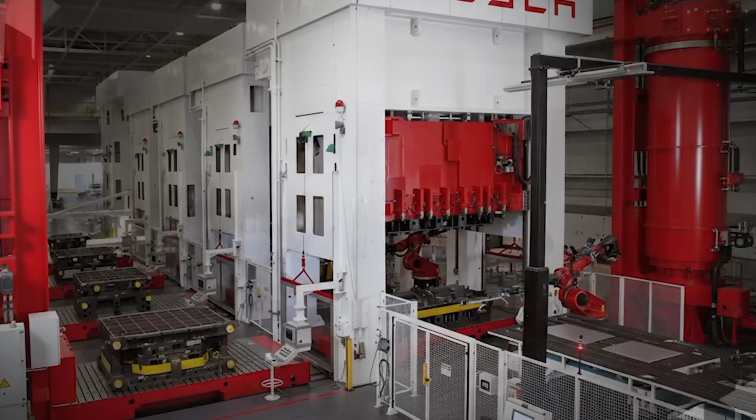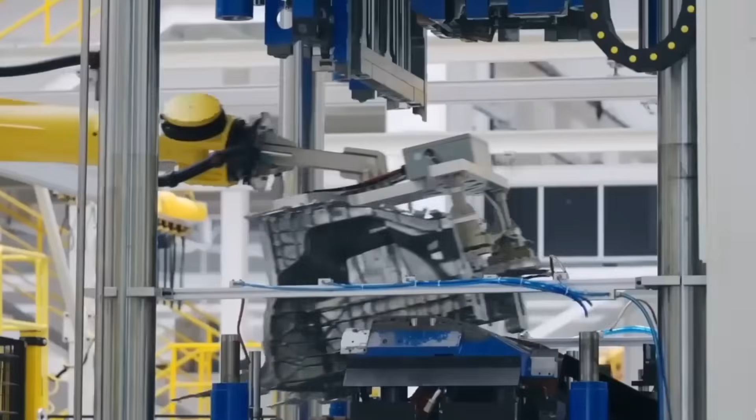For decades, China viewed itself as the undisputed champion of large-scale manufacturing, a nation capable of producing products faster, cheaper, and in greater volume than anyone else. Massive factories, endless assembly lines, and armies of workers became symbols of industrial dominance. Then Tesla entered the picture and began rewriting the definition of speed in automotive production. Not slightly faster, not incrementally improved, radically different.

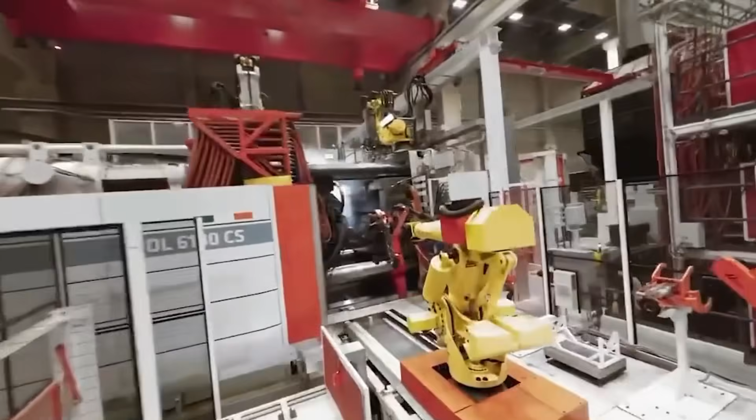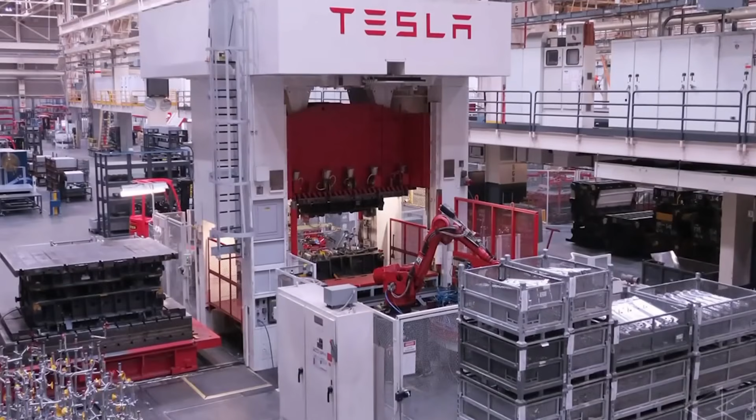Elon Musk has claimed that Tesla's next-generation production system could push output to the point where a finished vehicle effectively rolls off the line in under 30 seconds. That statement alone challenges everything the traditional auto industry has accepted for decades. At the center of this shift is Giga Press 2.0, an evolution of the original Giga Press technology that already transformed how vehicles like the Model Y are built.

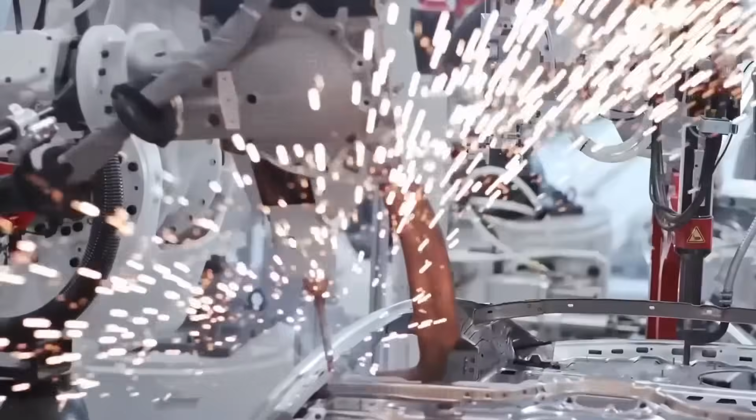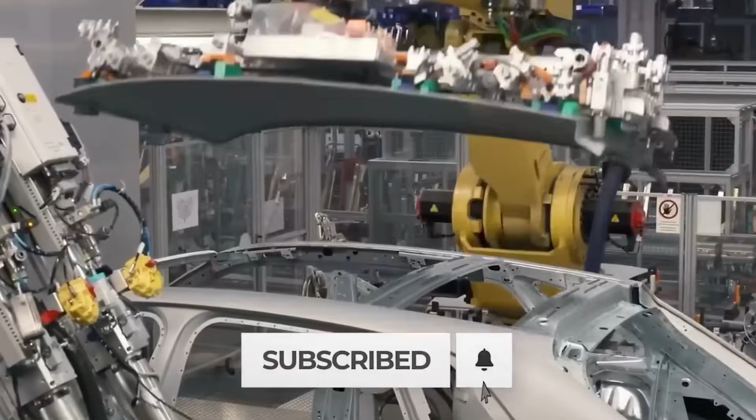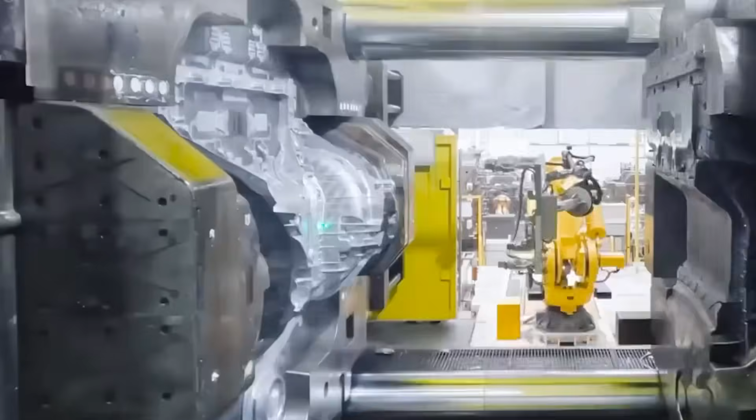Conventional factories rely on hundreds of stamped metal parts welded together piece by piece. Each weld is a potential delay, a potential defect, a potential cost. Even the most advanced plants typically require well over a minute, often closer to 2, to complete major structural assemblies. Multiply that by millions of vehicles, and the time difference becomes enormous. Tesla's approach flips that entire philosophy. Instead of assembling dozens of parts into one structure, they cast enormous structural sections in a single shot.

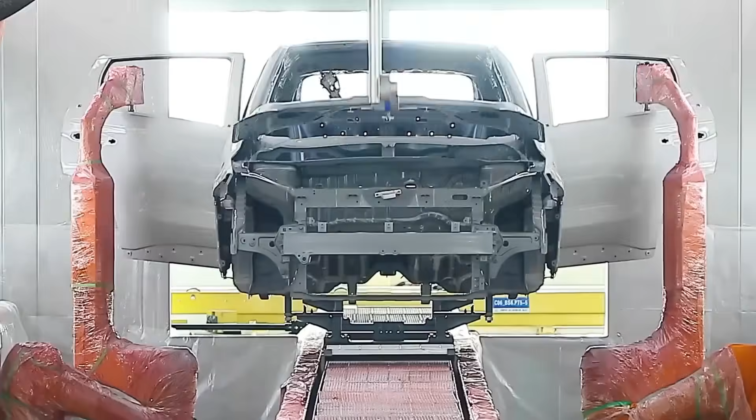Giga Press 2.0 represents the extreme end of that idea. Imagine a machine the size of a 2-story building, engineered to exert up to 50,000 tons of clamping force. That number alone sounds unreal. It is more than 8 times the force of the 6,000-ton class machines Tesla used to revolutionize Model Y production. With that earlier generation, Tesla replaced more than 70 individual components with just 2 large aluminum castings integrated with a structural battery pack. Production costs dropped dramatically. Complexity fell. Assembly lines became shorter and faster.

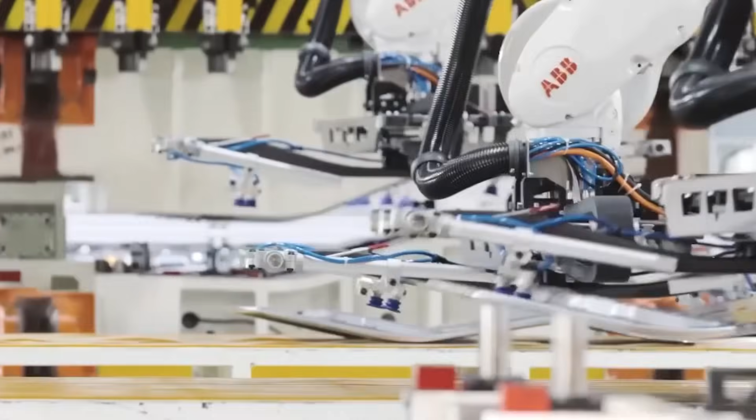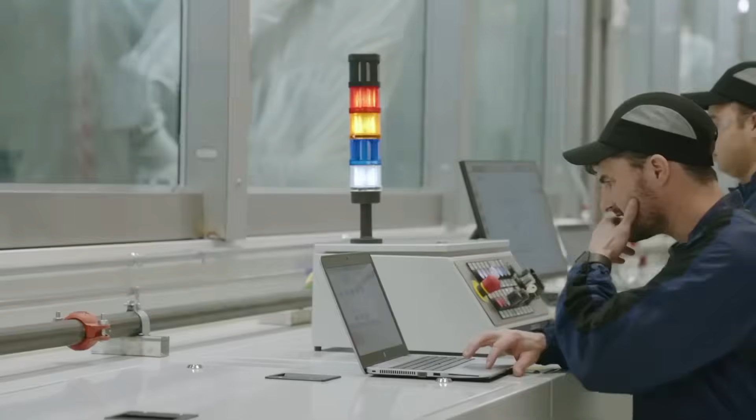Now Tesla aims to go even further. The ambition is to cast an entire underbody structure in a single seamless piece. Instead of stitching together dozens of structural elements, the chassis foundation emerges as one unified component. Fewer welds, fewer robots, fewer alignment checks, less opportunity for error. When Musk compares it to making toy cars, the point is not exaggeration for effect. It is about reducing the process to something that feels almost simple, even though the engineering behind it is anything but.

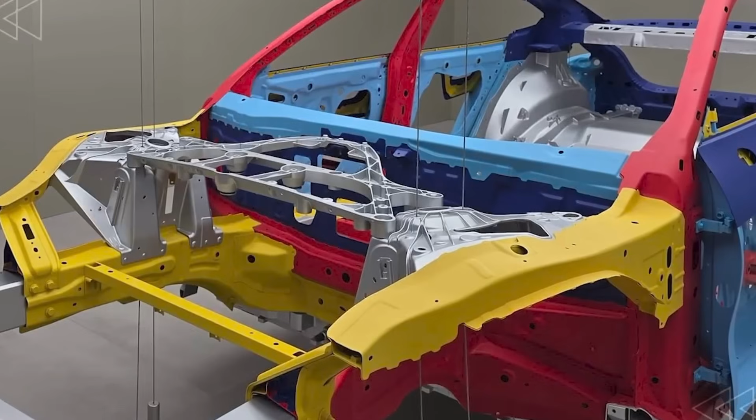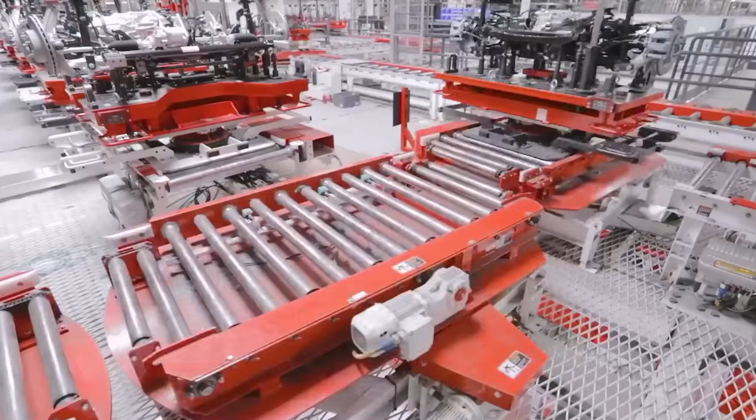This technology becomes especially important when discussing Tesla's upcoming compact vehicle, widely referred to as the Model 2. The goal is bold, a high-volume electric vehicle priced around $25,000, designed for true mass market adoption. Musk has suggested production ambitions reaching tens of millions of units over time. That level of output cannot rely on traditional assembly methods. It demands a production philosophy built for extreme scale.

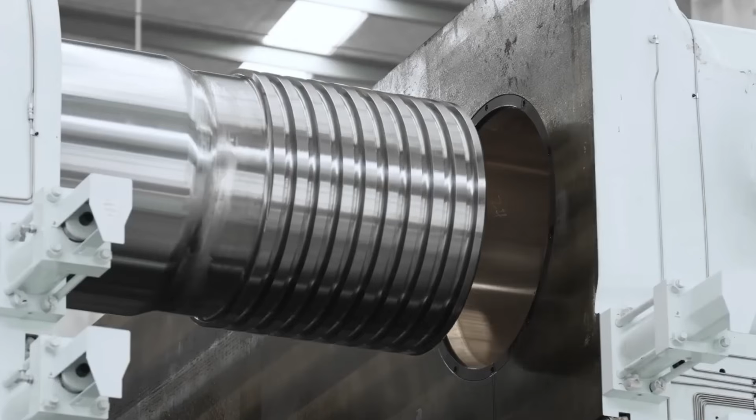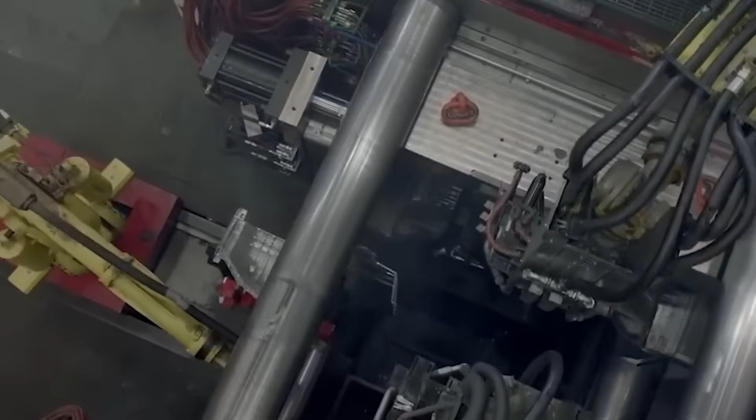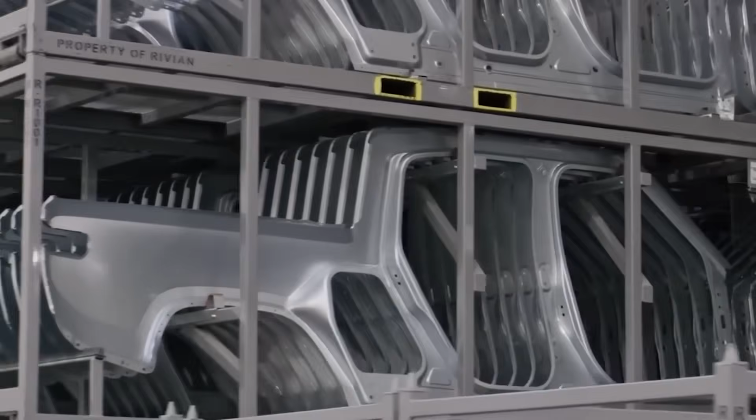The compact size of the Model 2 actually works in favor of this casting strategy. With shorter overhangs and a more condensed footprint, engineers can design a structural architecture optimized for single-piece casting. However, the previous 6,000-ton presses lack the power required to mold such a large unified section in one go. That limitation led to the development of Giga Press 2.0. According to internal discussions shared publicly by Musk, the new system could potentially produce multiple underbody frames in a single cycle. If achieved, that would push manufacturing throughput to levels never seen in automotive history.

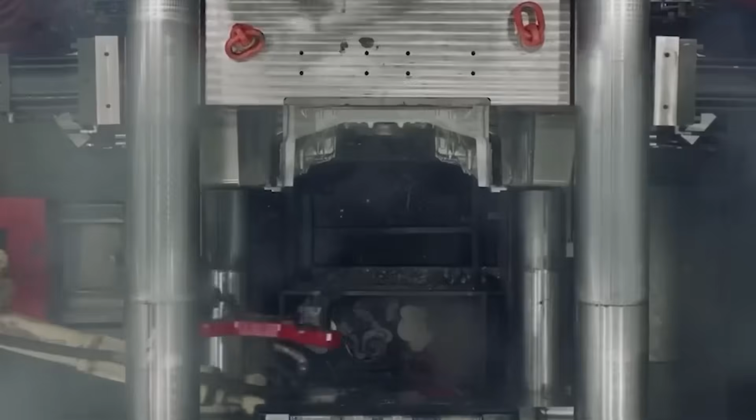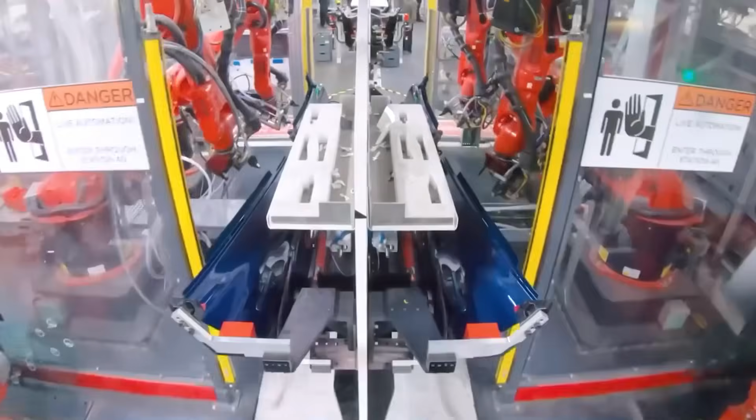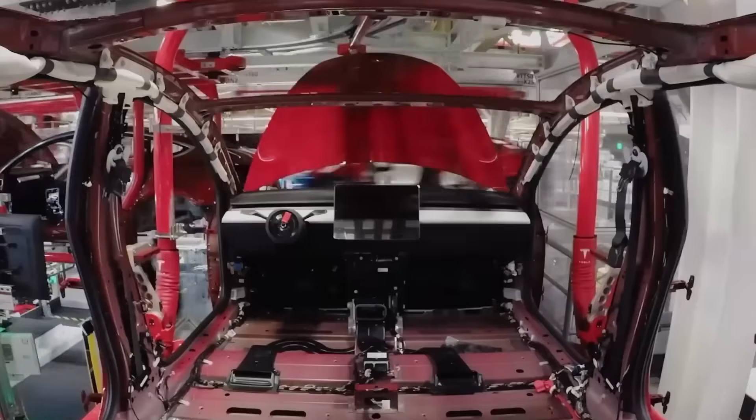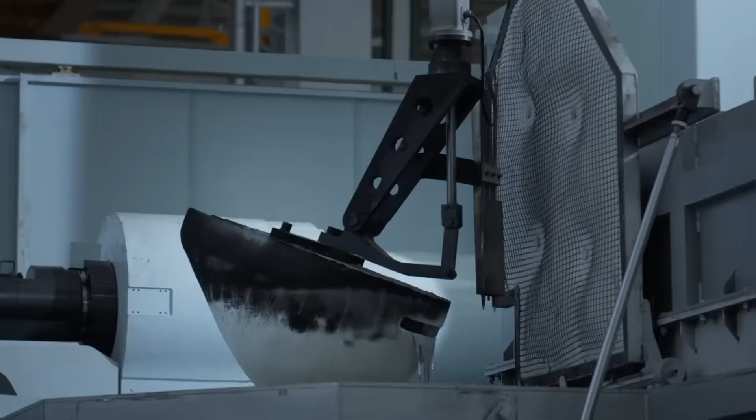The idea is not simply to build faster, but to compress complexity. Every eliminated weld reduces labor, inspection, and time. Every removed bracket reduces material cost. Every simplified assembly step reduces the chance of variation. The process begins with aluminum alloy preparation. Tesla uses carefully formulated blends that combine pure aluminum with recycled material from previous castings. Sustainability and efficiency intersect here. Excess material from one cycle is not discarded. It is collected, melted again, and reintegrated into future pours, forming a closed-loop system that minimizes waste.

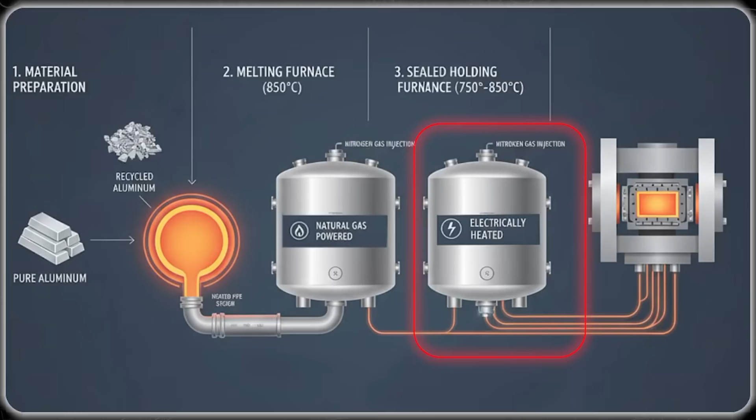To prepare the molten metal, aluminum is heated to temperatures around 850 degrees Celsius in specialized furnaces. Giga Press 2.0 reportedly uses a dual furnace configuration. One furnace, powered by natural gas, brings the metal to the required extreme temperature. A second electrically powered furnace maintains a stable thermal environment before injection. This parallel setup improves energy management and ensures the material remains at optimal consistency, reducing oxidation and preserving quality.

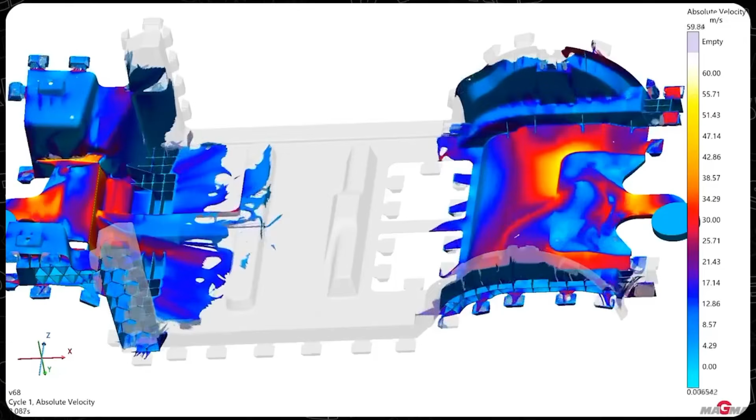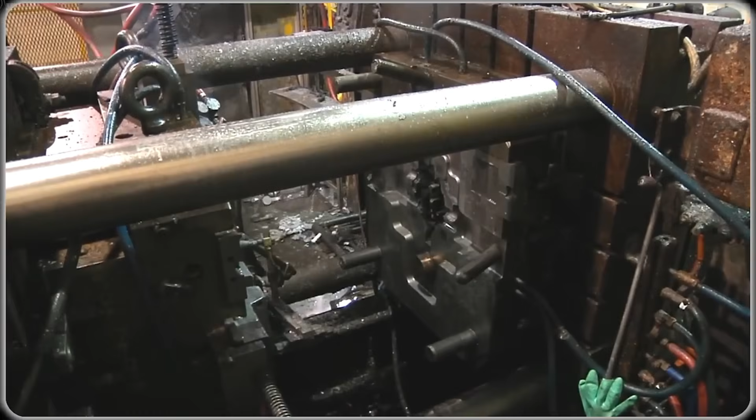Before casting begins, the molds undergo meticulous preparation. Ultra-high precision dies shape the final component. Robotic systems apply a fine release agent, often soybean-based oil, to prevent molten aluminum from bonding to mold surfaces. This lubrication protects tooling and ensures smooth part removal after solidification. Even small inefficiencies at this stage could introduce defects, so automation guarantees consistency cycle after cycle.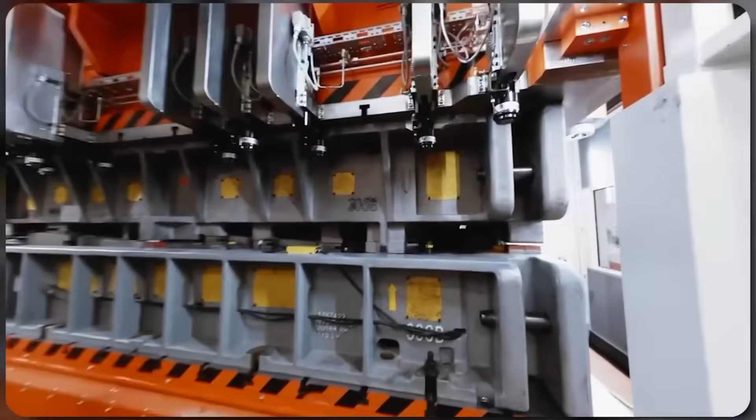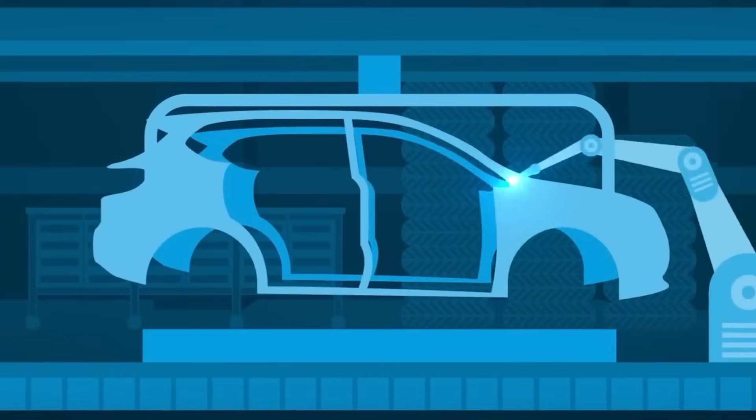Next comes vacuum preparation. Air trapped inside the mold can create porosity within the casting, weakening structural integrity. A vacuum system evacuates internal air, creating a near-perfect environment for metal injection. Then, in a fraction of a second, a high-speed piston forces molten aluminum into the mold cavity. The injection velocity is immense. Within milliseconds, intricate channels and structural ribs are completely filled.

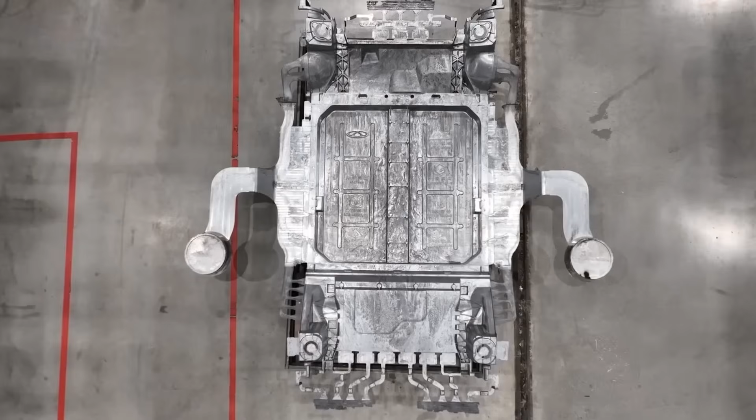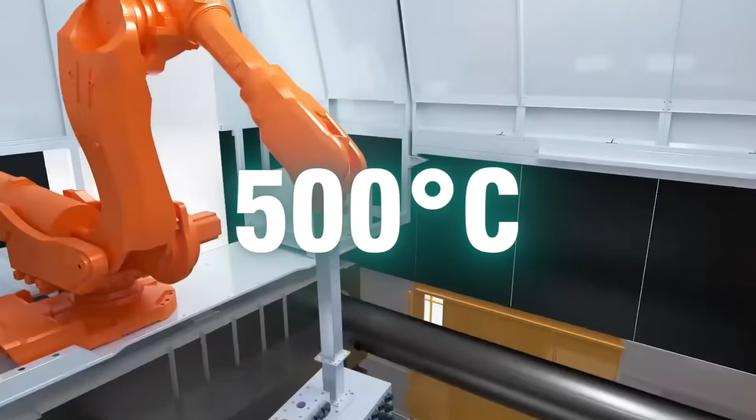Managing pressure during this stage is one of the greatest engineering challenges. Molten aluminum moving at such speed generates enormous internal forces. Without sufficient clamping strength, molds could separate or deform. That is where the 50,000-ton clamping force becomes essential. The mold halves are held together with extraordinary power, preventing leakage or distortion and preserving dimensional precision.

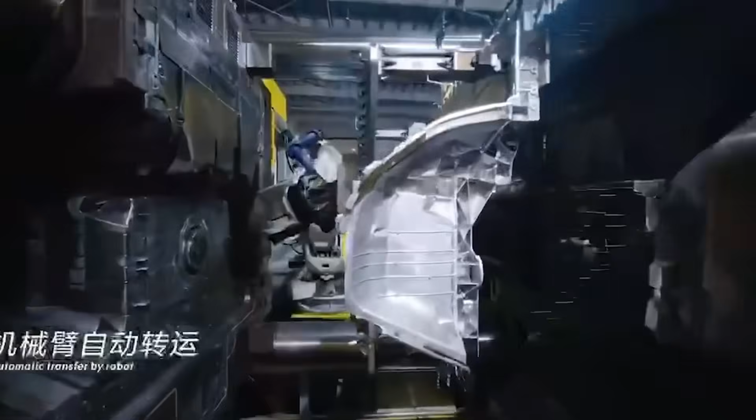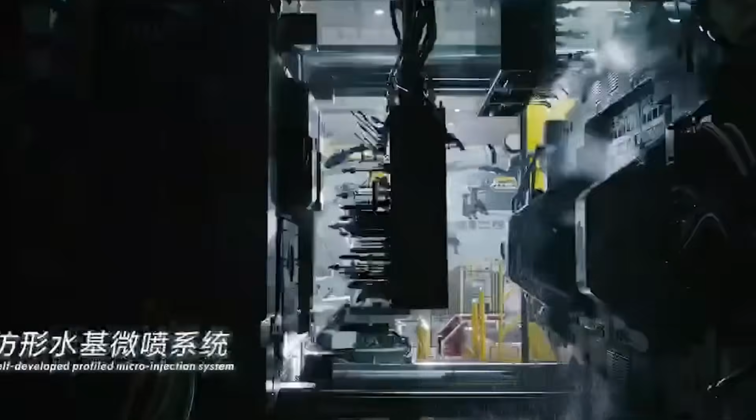After injection, the metal begins to solidify. Cooling must be controlled carefully to maintain uniform grain structure and mechanical strength. Once solidified enough to maintain form, the component is extracted at temperatures that can still approach 500 degrees Celsius. Immediate quenching in a cold water bath rapidly lowers temperature, increasing hardness and tensile strength. This step enhances durability and prepares the casting for downstream processes.

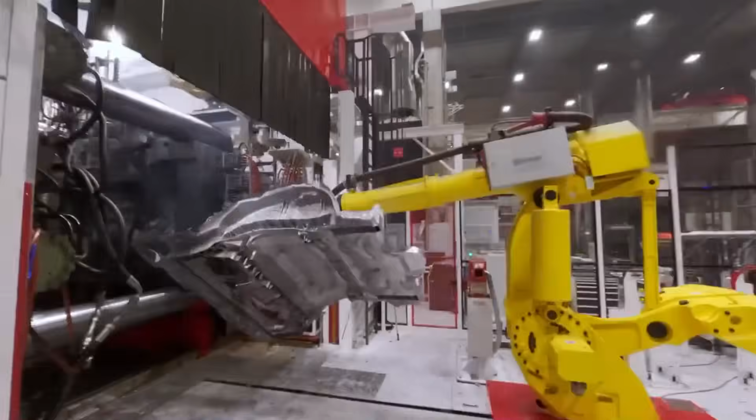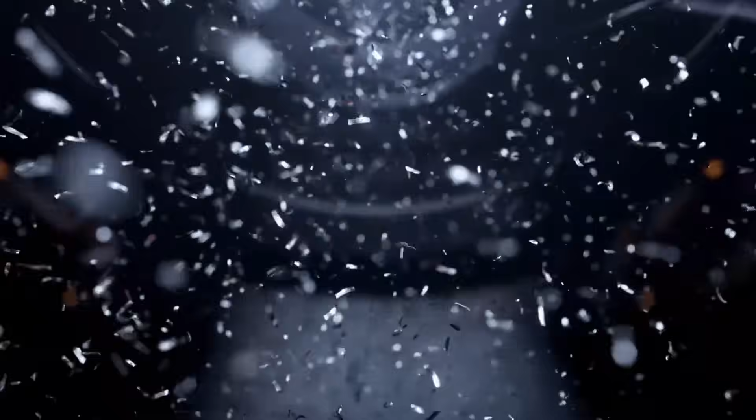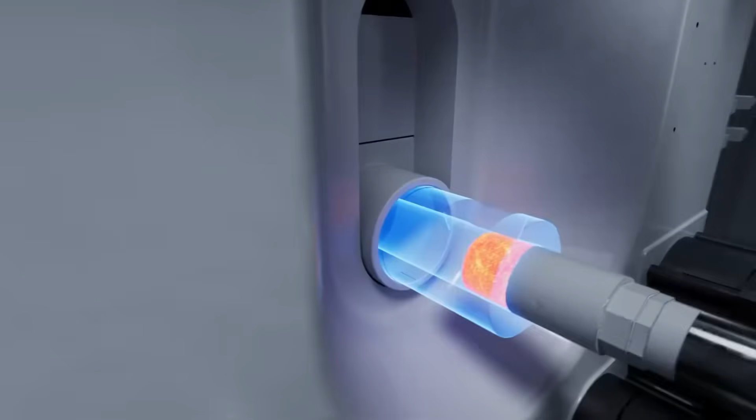Quality assurance follows. Advanced X-ray scanning systems inspect each casting internally, searching for voids or imperfections invisible to the naked eye. Structural components cannot tolerate hidden weaknesses. Only parts meeting strict tolerances proceed further down the production line. Once approved, cast sections move toward robotic assembly stations. Here, fewer operations are required compared to traditional methods. Because large structural portions are already unified, welding steps are drastically reduced or eliminated. Machining operations shrink. Alignment complexity decreases. The result is a chassis that is lighter, stiffer, and quicker to assemble.